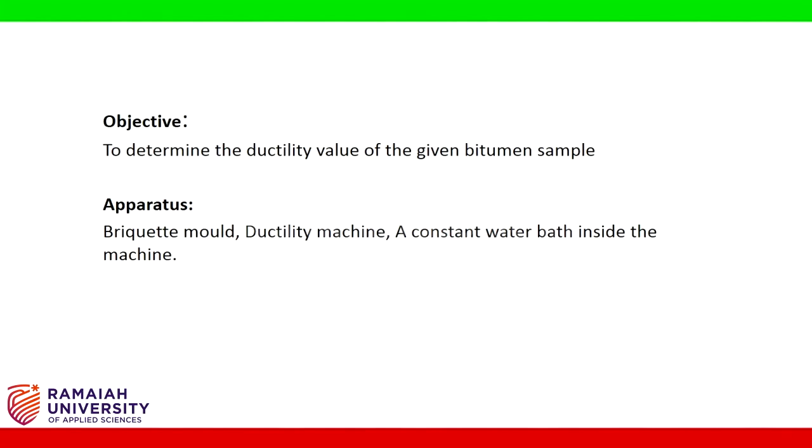Hello students. With this experiment, we are determining the ductility value of the given bitumen sample. Apparatus: briquette mold, ductility machine, a constant water bath inside the machine. In the flexible pavement construction where bitumen binders are used, it is of significant importance that the binders form ductile thin films around the aggregate.

Ductility is the property of bitumen that permits it to undergo great deformation or elongation. Ductility is expressed in centimeters, to which a standard briquette of bitumen can be stretched before the thread breaks.

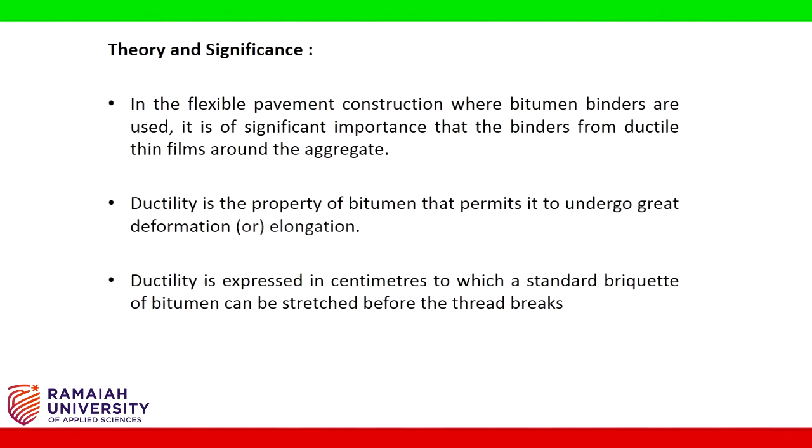Procedure: the bitumen sample should be heated to a temperature of 75 to 100 degrees Celsius, at which the bitumen softens. The sample is thoroughly stirred to make it homogeneous and free from air bubbles. Pour the bitumen sample into the briquette mold with the side clips. The sample along with the mold is cooled in air for about 30 to 40 minutes and also cooled in water bath for about 30 minutes.

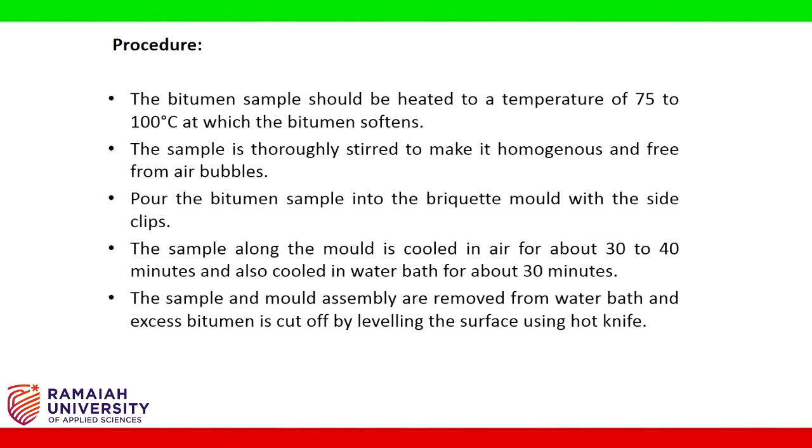The sample and mold assembly are removed from the water bath and excess bitumen is cut off by leveling the surface using a hot knife. After trimming the specimen, the mold assembly containing the sample is placed in a water bath maintained at 27 degrees Celsius for 85 to 95 minutes. The side clips are removed carefully. 2 or more specimens are prepared in order to conduct the trials.

The pointer of the machine is set to 0. The machine is started and the 2 clips are then pulled apart horizontally. The ductility value is measured in terms of centimeter.

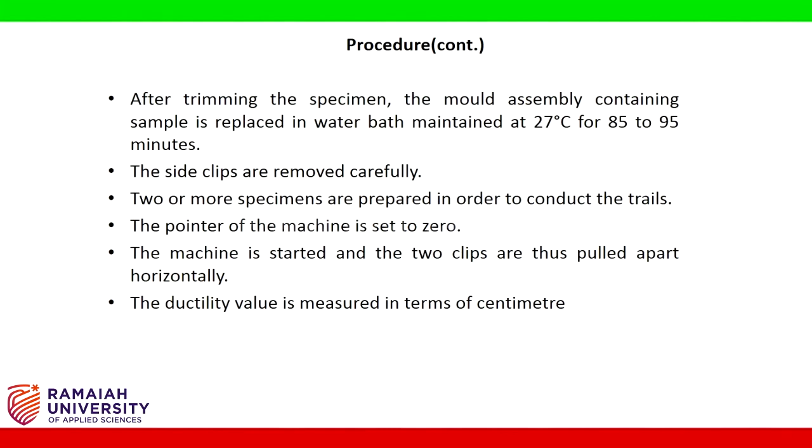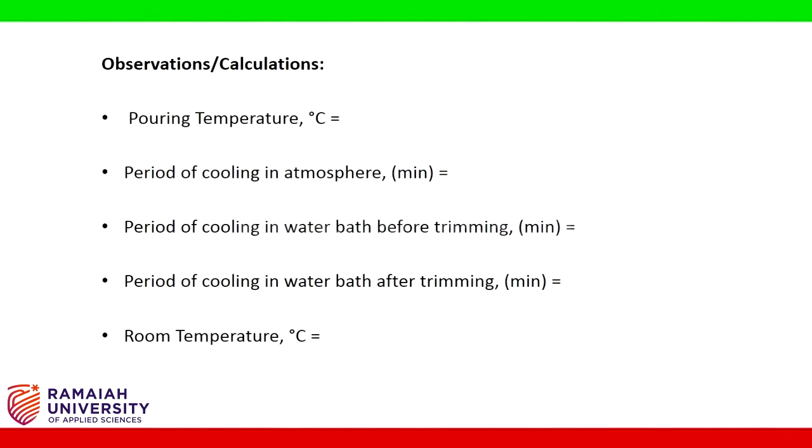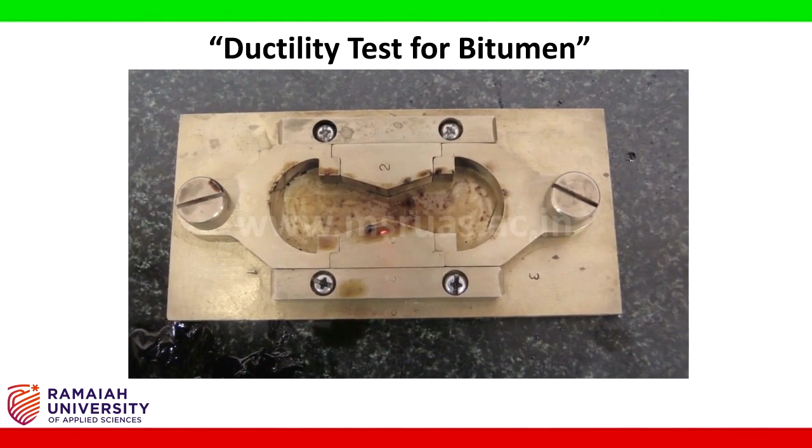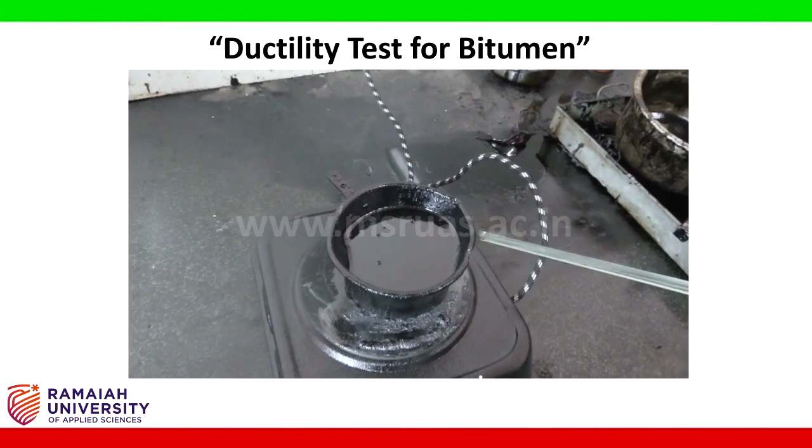Hi students, as a part of Concrete and Highway Laboratory, we are now discussing an experiment called ductility of bitumen. The apparatus required for this particular experiment is the briquette mold. Next apparatus required is a thermometer. We require a sample of bitumen to be tested and also a hot plate. Let's start doing the experiment.

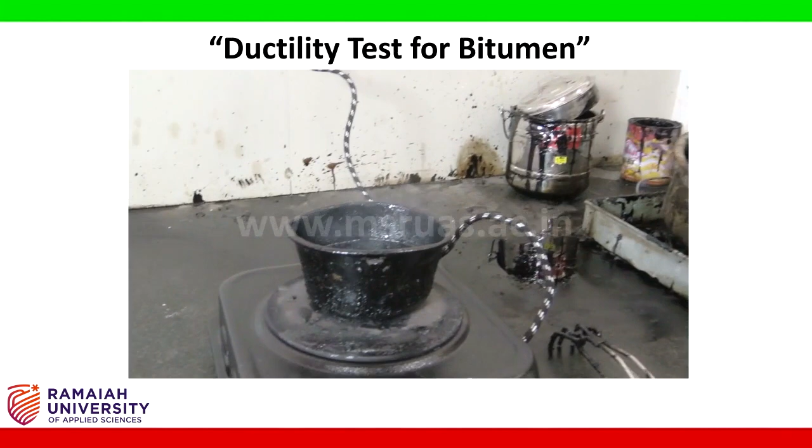Make sure that the bitumen is attaining the pouring temperature. You measure the temperature of the bitumen; it should be around 125 degrees centigrade. After attaining the pouring temperature, we are going to transfer the bitumen to the briquette mold. Make sure that the inner surface of the briquette mold as well as the bottom plate is completely smeared with the soap oil

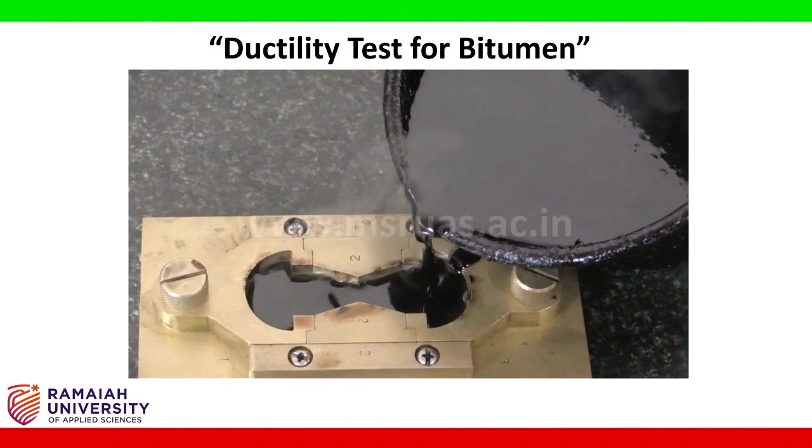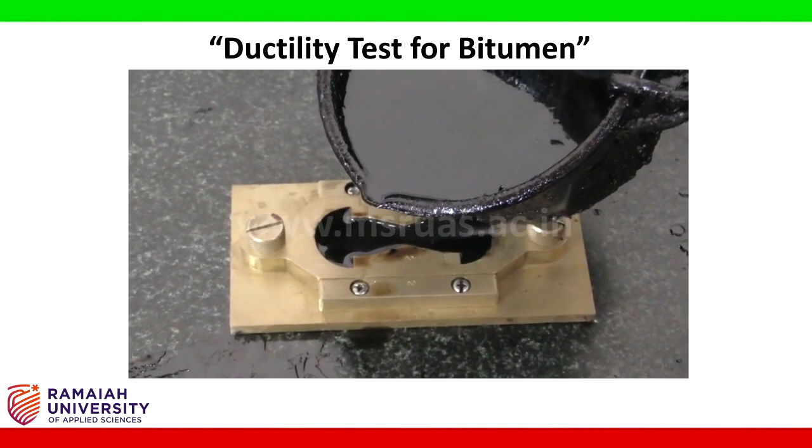and apply the pouring bitumen into it. Apply the pouring bitumen into it completely to the top. After this, we are going to make sure that the excess portion of the bitumen which is on the sides of the mold is removed completely.

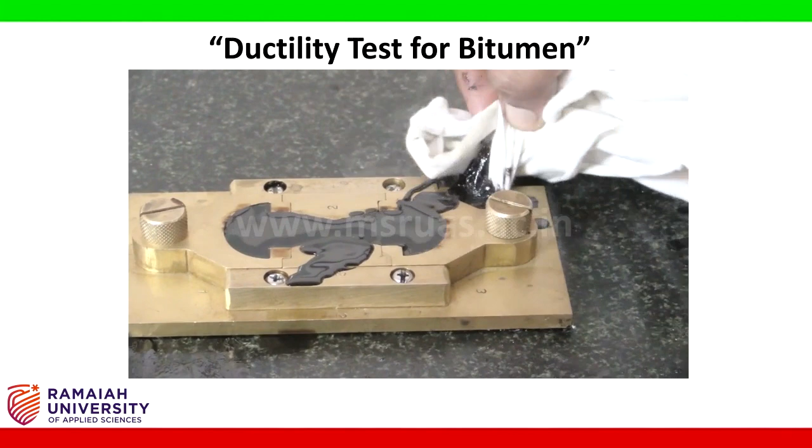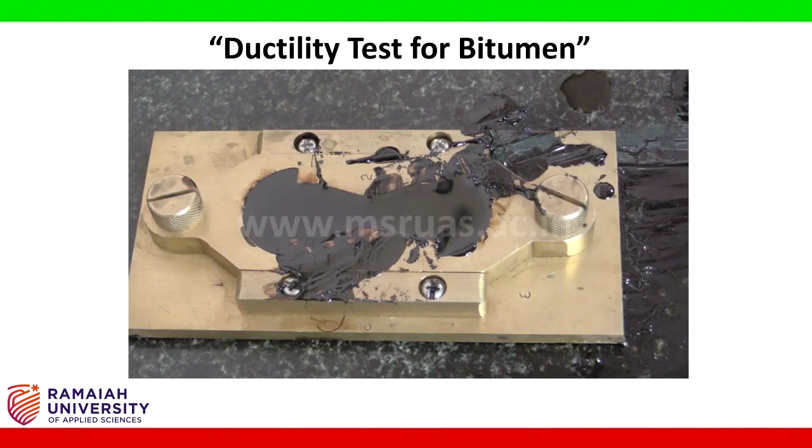We keep the prepared sample in air cooling for 1 hour as well as water cooling for 1 more hour. We do the conditioning of the sample. After preparing the sample for ductility, this is the sample we obtained. This will be fixed in the ductility testing machine. So I am going to place it on the, now it is fixed.

This ductility apparatus consists of a heater, a pump and a motor, and we have a temperature controller. When we switch on the equipment, it asks for the standard temperature to conduct the experiment. If you observe, the standard temperature required is 30 degrees. If it is in a cooler condition, we are going to switch on the heater and raise the temperature of the water.

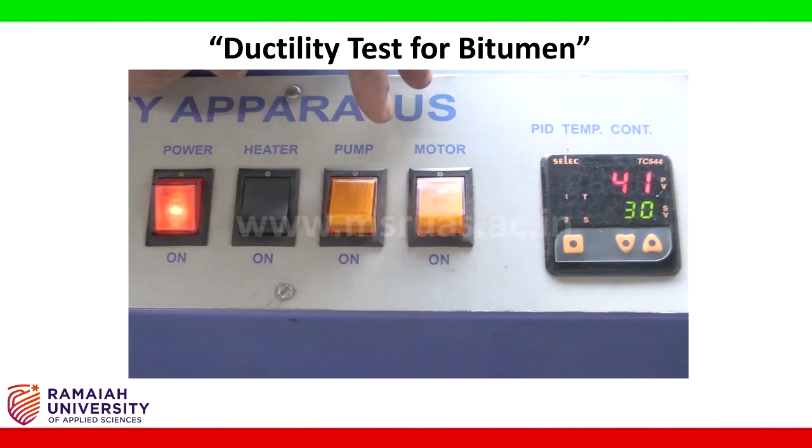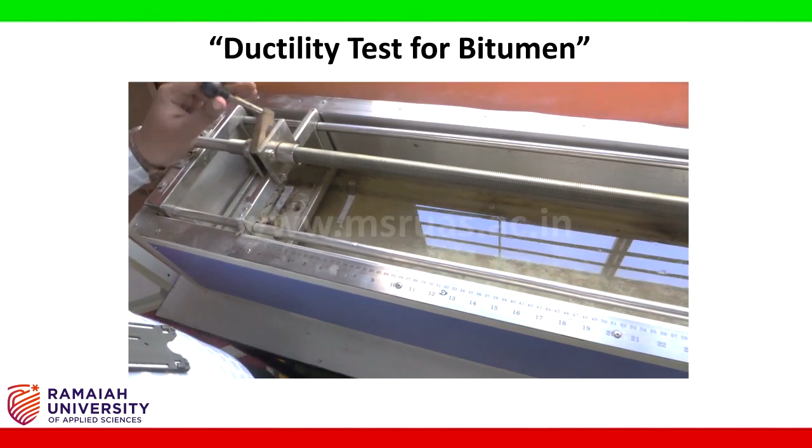And if you want to remove the water present in the ductility apparatus and put a fresh one, you are going to use a pump. The motor is for testing. When you switch on the motor, there is a shaft connected to the motor. Right now it's in a rest condition, it's not moving. I need to give rotations, which can be controlled by giving the rate of pull. Here there are 2: 10 mm as well as 50 mm. Here we are going to give a pull of 10 mm.

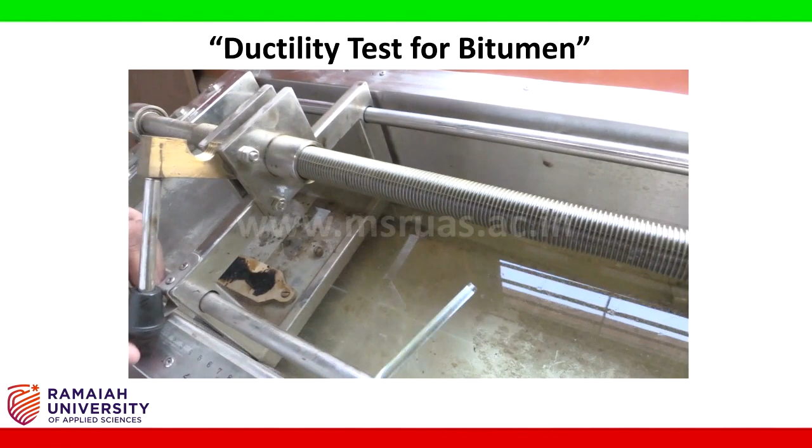When I give a pull of 10 mm, you may observe this is under the rotational effect. Observe the rotation of this particular system. After this, I am going to lock it. When I lock it, what is going to happen? You are going to observe the pull in the specimen.

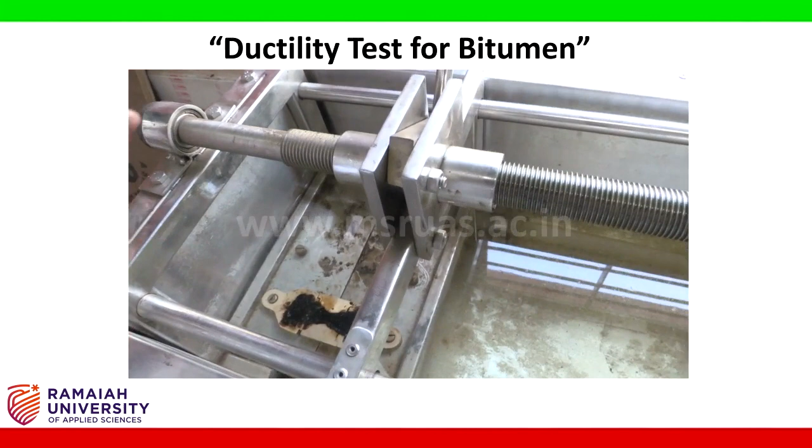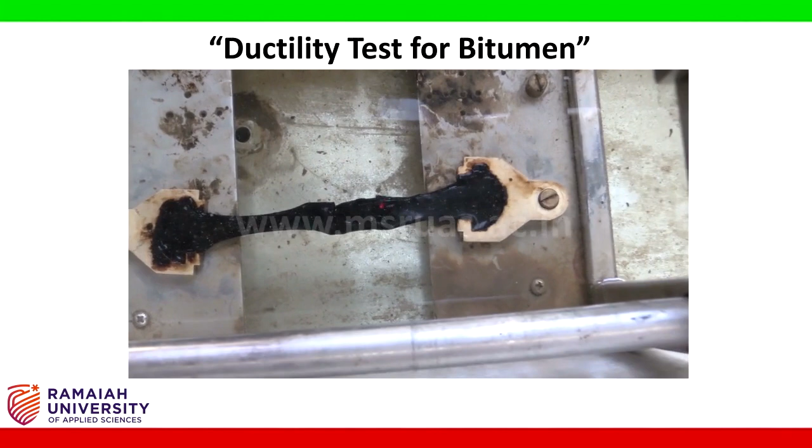What's happening here is this bitumen sample is elongating. If you keenly observe, there is a graduated scale attached to this moving system. Failure will be considered under 3 conditions. One, you start elongating the sample; at one particular reading, thread formation happens and the thread cuts. That particular reading will be taken as the ductility value of the bitumen.

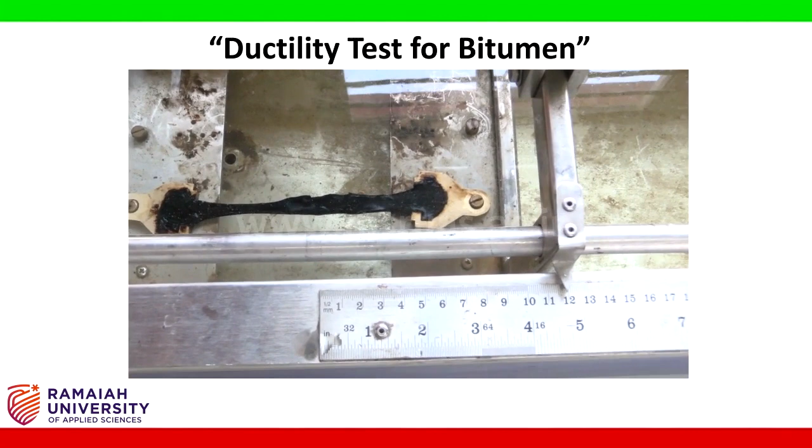In the second condition, if no cut happens, the thread does not cut and it elongates beyond 100 centimeters. In that particular case, the ductility value of the bitumen will be taken as 100 plus. In the third case, it neither fails nor expands above 100 centimeters.

In this case, sagging is going to happen. Sagging means the bitumen is going to sag and touch the bottom of your ductility apparatus. Whichever value where there is sagging and touching, that particular reading will be taken as the ductility value of the bitumen. Observe, there is a formation of thread and sagging is about to happen.

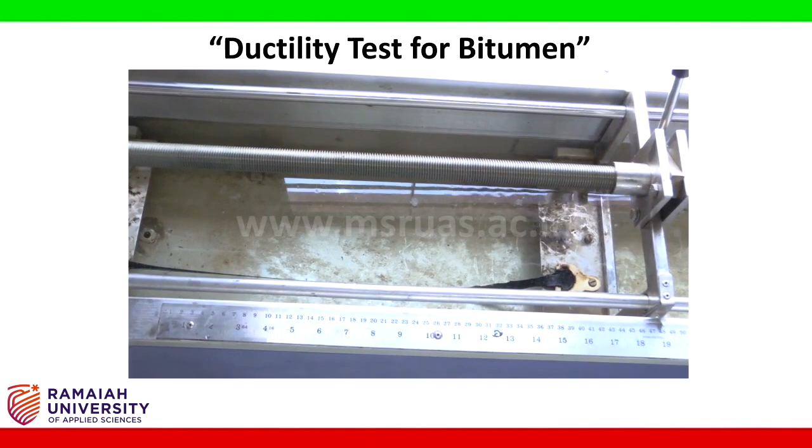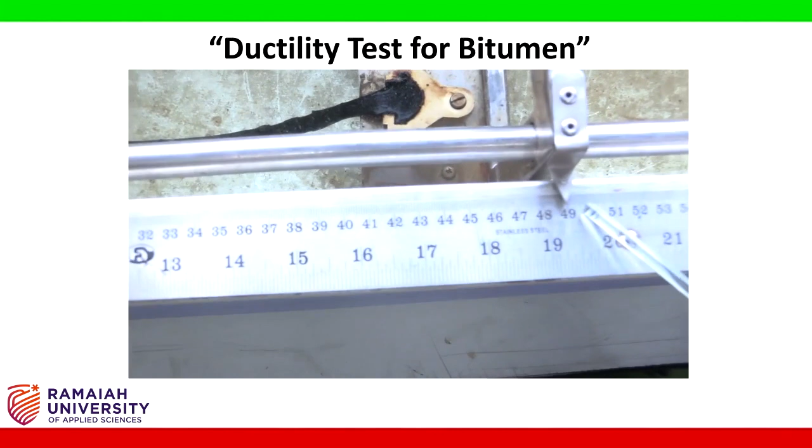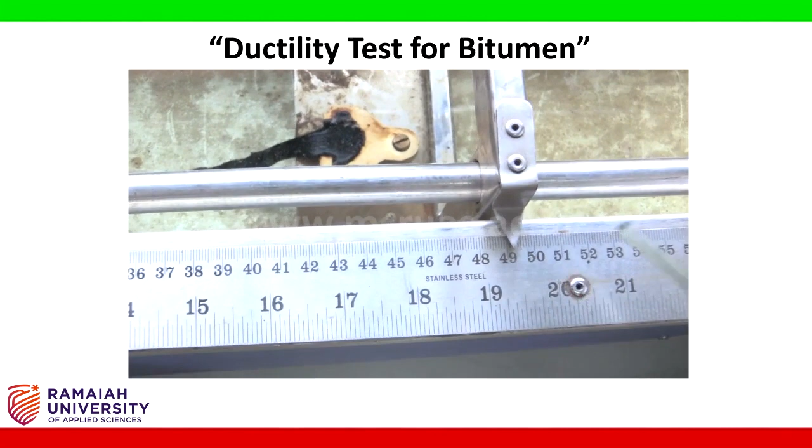Yes, it touches the bottom. This particular reading, 49 centimeters, is considered as the ductility value of the bitumen. So this particular value will be taken as the ductility value of the bitumen. This completes the ductility test on bitumen.